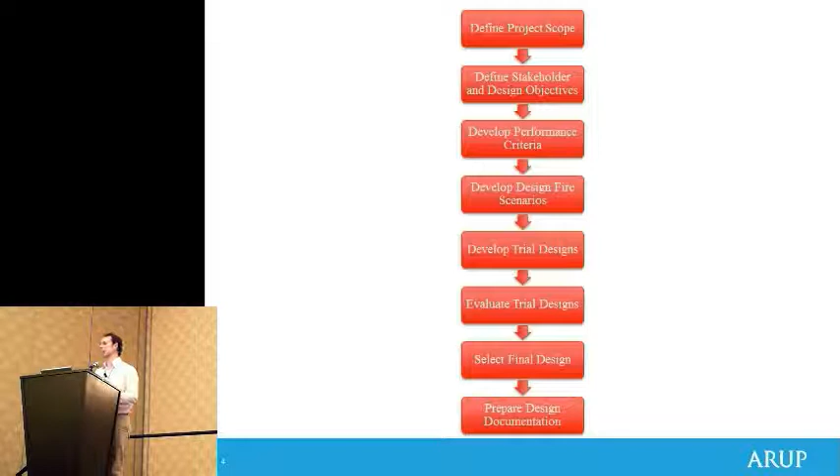The overarching theme for us really was to keep it simple, keep those systems simple. And from a technical point, one of our objectives was to keep it independent from the Amtrak yards and Penn Station to the east of the site, so that we weren't dependent on their systems and vice versa. So stepping through the rest of the methodology, it's really typical of the SFPE guide, which many of you will be familiar with, and I'll give you a brief overview of each of those points.

So as I mentioned, the key life safety criteria are really looking at the evacuation portion early on when the fire actually starts off and we get some sort of alarm, getting those maintenance staff out quickly, and then making the conditions suitable for the firefighters as well. The criteria for those is somewhat different, as you'll be generally familiar with.

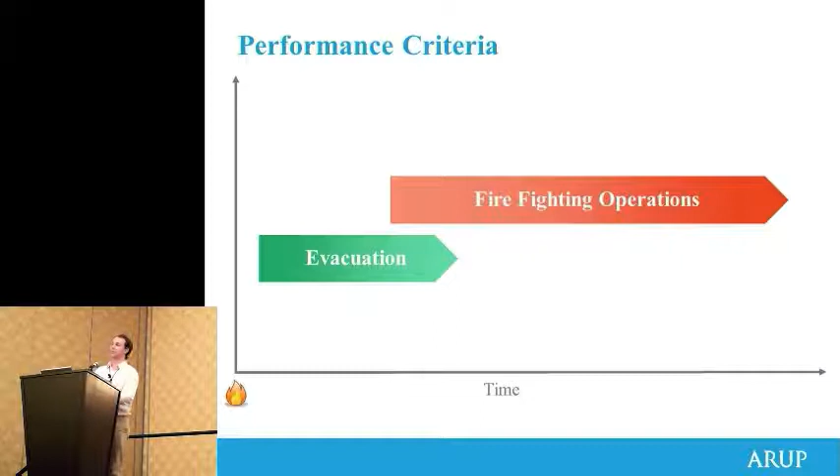For occupants, we're looking at your standard visibility and temperature, but then for firefighters, they've got their full turnout gear, which means that they've usually got breathing apparatus, so visibility and toxicity are less of an issue, except visibility in terms of being able to find the fire and walk through clearly. And in terms of thermal exposure, they can withstand a much higher temperature than occupants.

So the critical metric really was to look at getting people out early. And what we really needed to do was have a clear understanding of what the available exits were and what the occupant load was within that space.

So working with the Long Island Railroad, we were able to establish what the occupant load was for the space, which was roughly 125 occupants within each of the various maintenance buildings, and then up to 25 within the yard. So it's quite a low occupant load when you consider the types of buildings that we're often working with.

There were 6 exits scattered around the site, but really the critical thing for this site was travel distance. Because you've got various train consists on the site, some of the occupants would have to walk up to 890 feet to get to an exit because you can't actually transfer between the trains.

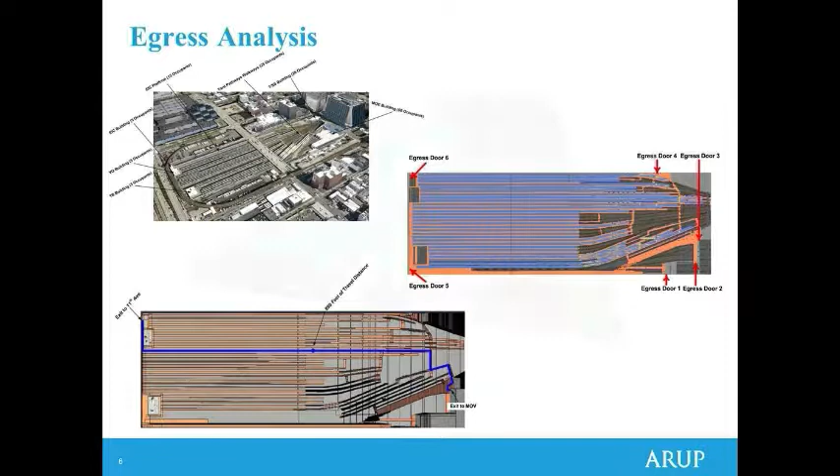So for this project, we did actually run a model, but it's important to note that particularly with a low occupant load like this, we didn't really need to. We could actually establish what our performance criteria is just with doing our basic NFPA 130 hand calculations.

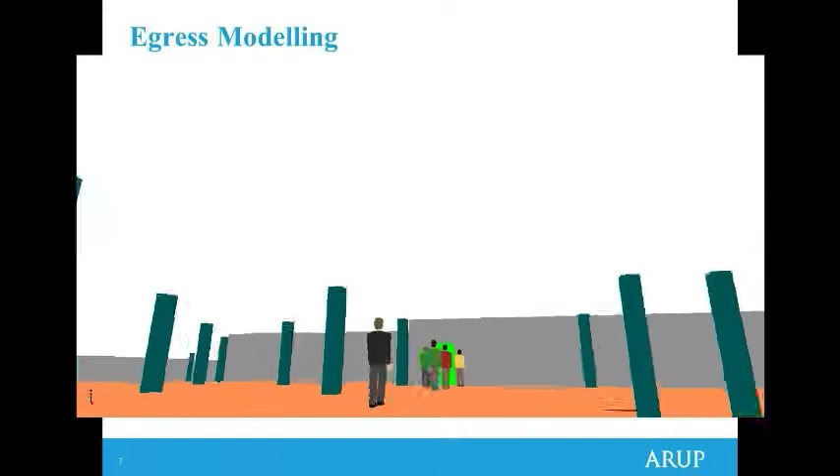But the real benefit of running a model in this type of situation is improving the project deliverable, which is all about impressing our client and also being able to convey the design to the authorities as well, which really helps to convey what we're trying to achieve within the space and give them a sense of the conditions.

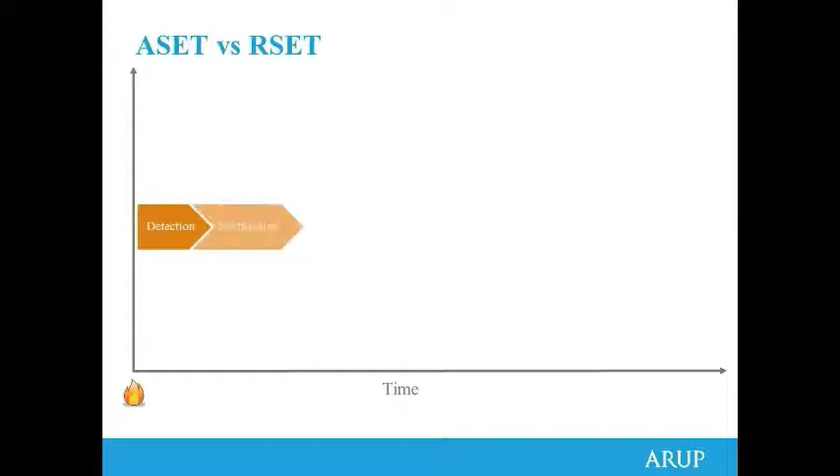So stepping through this in terms of our performance criteria, you'll be largely familiar with this. We break it down into detection, notification, pre-movement and movement time to establish our evacuation time, and then having some minimum margin of safety, which we typically aspire to be 100% of the movement time. And we get an overall time that is really our starting point in terms of what we need to maintain with our smoke systems.

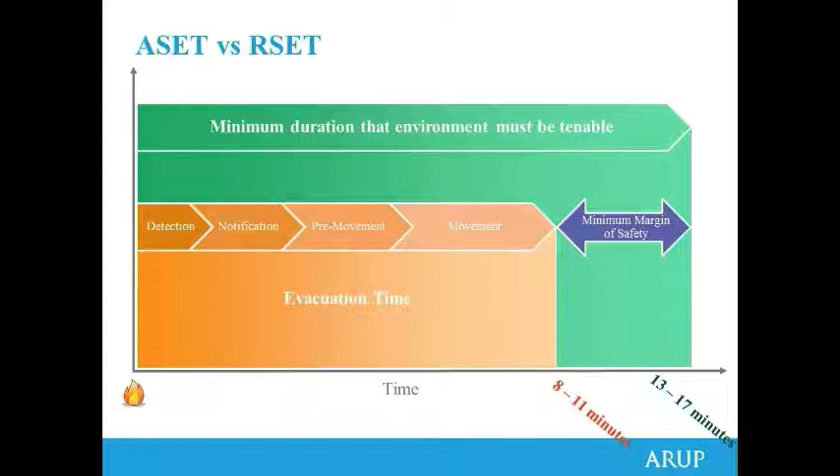So a summary of that, we had basically a range of 8 to 11 minutes for our evacuation time using sprinkler activation, typical notification and pre-movement times, and then using the modelling to establish the movement time. If we incorporate the margin of safety, we were looking at the range of 13 to 17 minutes that we need to maintain occupant tenability.

So getting into the design fire, the actual design fire curves you'll see here are governed by Long Island Railroad, which actually works quite closely with Amtrak, and they have two fire curves. They have a single rail car, which grows up to 5 megawatts, then to 10, and then eventually up to 31 megawatts at the peak heat release rate.

And they also have a 2 rail car fire, which basically involves roughly at the 23rd minute fire spreading from one car to the other. And those really were kind of the basis for our design fires.

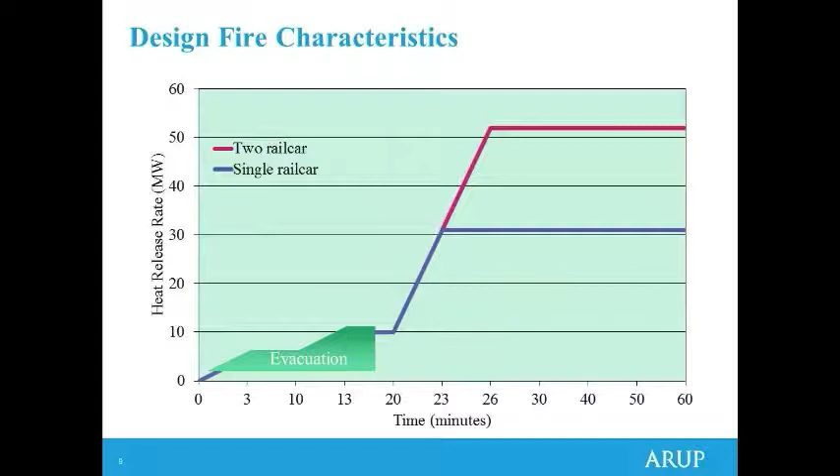If we look at that in the context of what we're trying to achieve, which is really occupant evacuation and secondly firefighter intervention, you can see the evacuation actually occurs before the two fire curves actually separate. So it's really within that early period up to 10 megawatts, and then firefighter operations from then on.

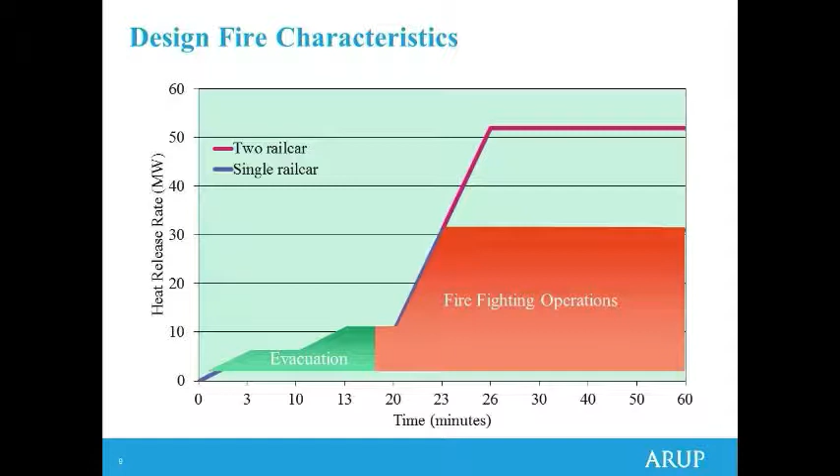The second thing to note really there is that firefighters will be on the site quite early. They're actually required to be on site after an alarm within 4 minutes. So they'll be getting water onto that fire quite easily before the 23-minute portion, before it spreads to the second car.

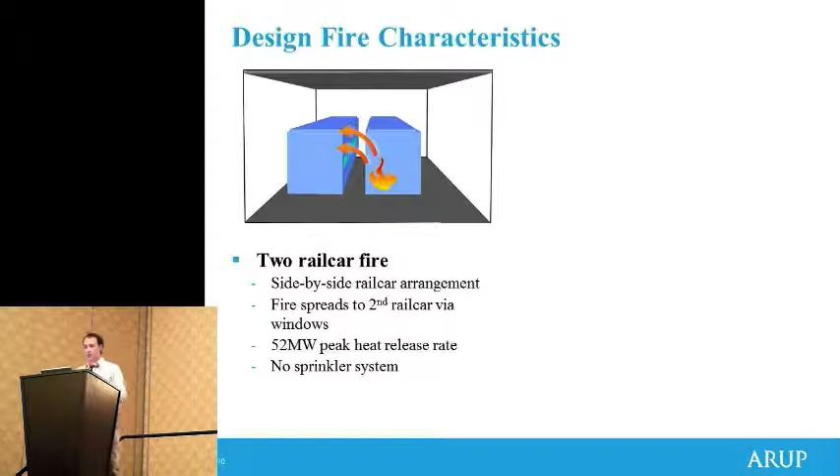Okay, so looking more at the 2 rail car fire, what we wanted to do was have an understanding of that. And really it's governed by essentially fire spreading from one to the other. But what we actually wanted to question there is what is the effect of sprinklers? This case here is actually based on an unsprinklered case. We wanted to understand what the benefit was of providing sprinklers in that space and if that could actually prevent fire spread.

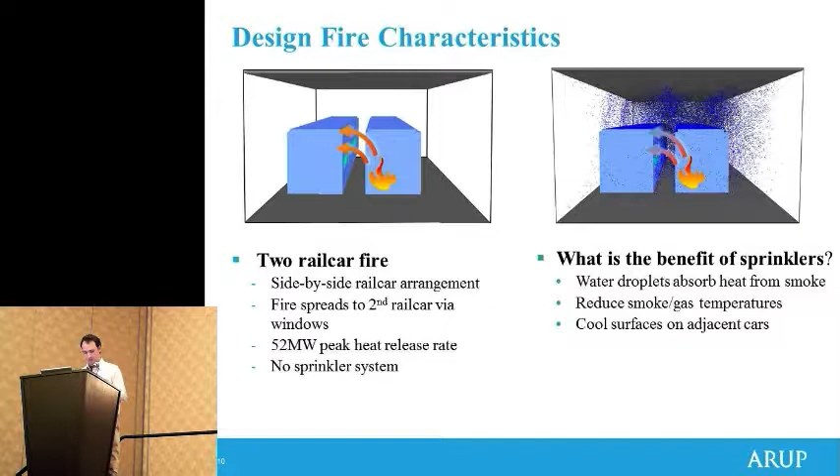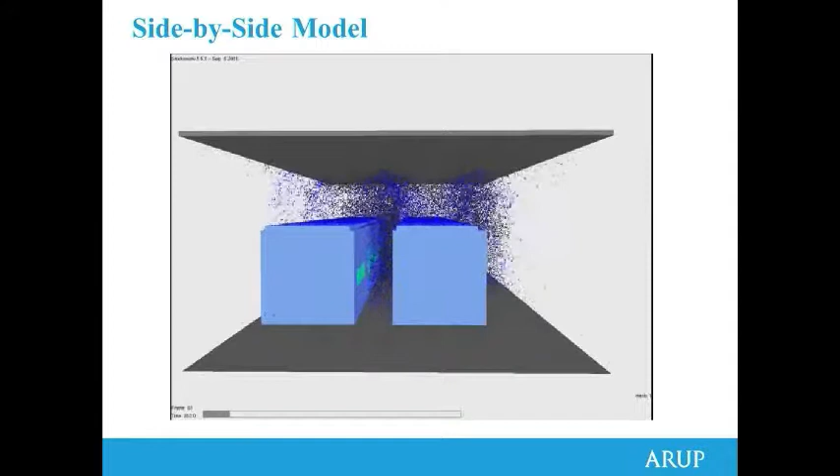So what we did to start off with in the design, we actually set up two models. We set up a side-by-side arrangement which reflected the Amtrak setup. And we also set up an end-to-end arrangement which simulates 2 cars in an 8-car consist, for example. This is a sprinklered case. We've got tracer particles for smoke in black, and the blue represents the sprinklers.

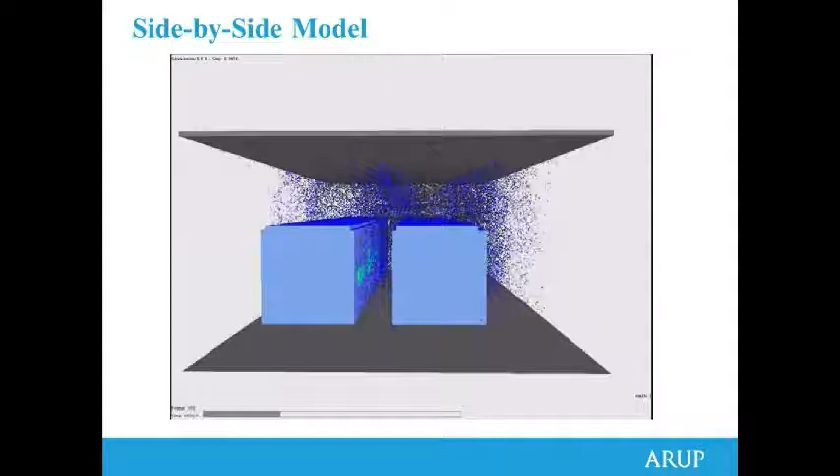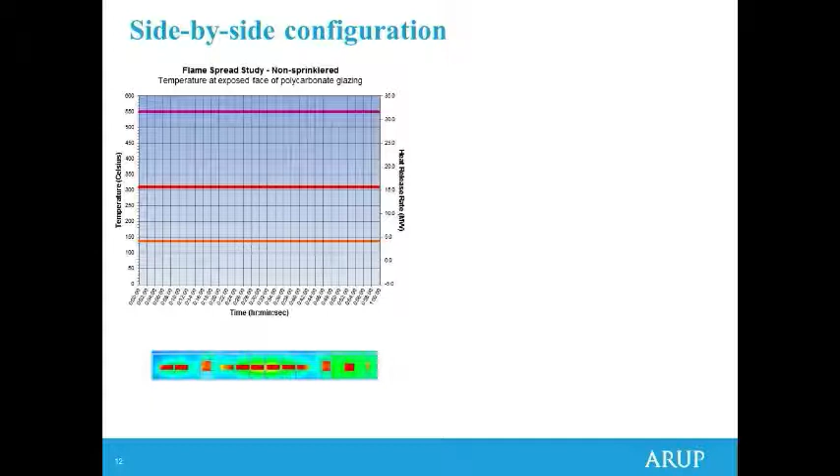So essentially our criteria in terms of looking at whether sprinklers would actually prevent this, in the range of 138 through to 310, if that temperature was maintained for a significant amount of time, we would consider that to be a failure.

So having a look at the results here for our non-sprinklered case as our baseline, these lines actually represent thermocouples on the adjacent car's windows. And as you can see, the temperatures go past the deformation temperature at roughly 20 minutes, and they exceed very, very rapidly up into the next phase. Just for reference, you can see the heat release rate curve and the alignment there.

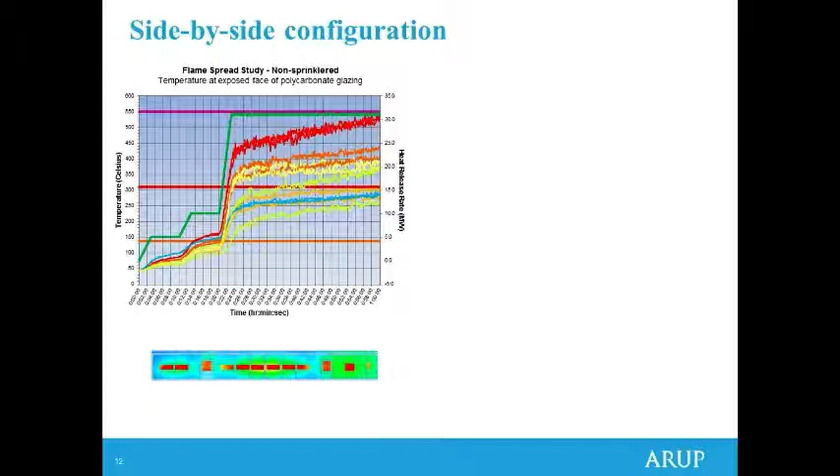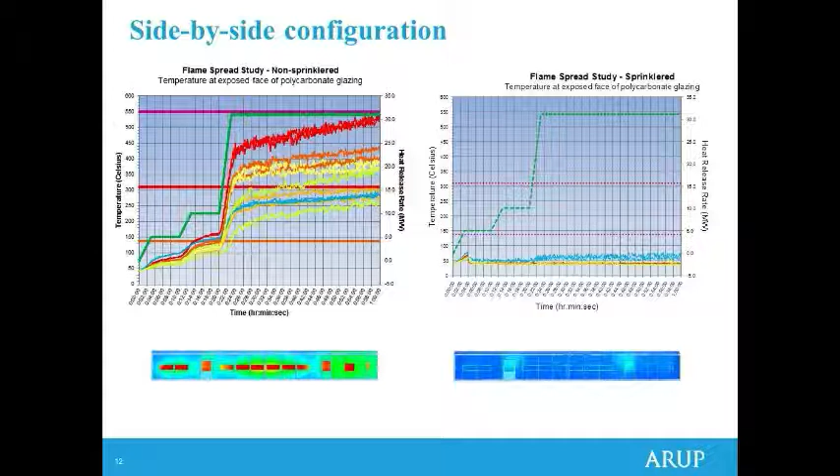Now, the end-to-end sprinkler case also passed. In that situation, it's actually a 2-foot separation as opposed to a 4-foot for the side-by-side. So the results are a little bit closer. Those details are in the paper. But these two results really got us to the point where we could confidently say, if we've got sprinklers in place and keeping in mind the fire department will be there when they get there, we could justify using a 31 megawatt fire as opposed to the 52.

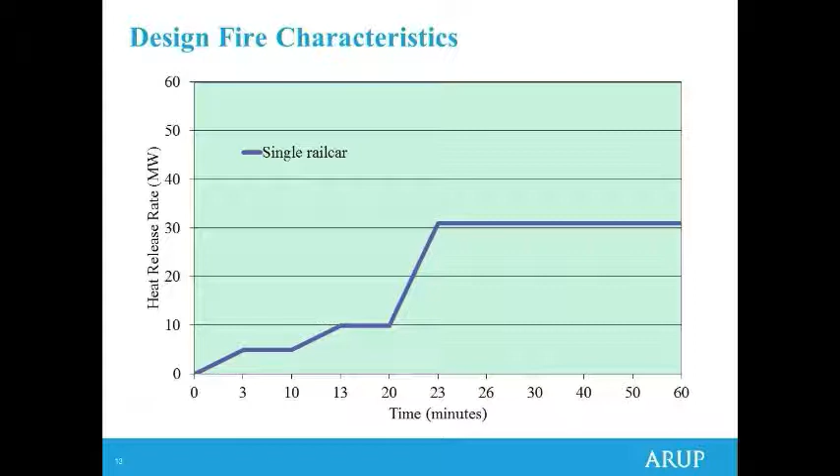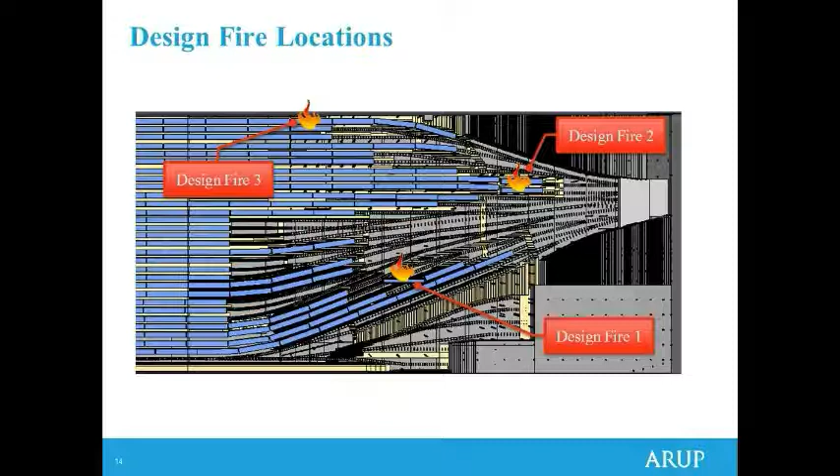Okay, so getting to design fire locations. The basis of our study, we looked at 3 basic locations. The first is a design fire near the maintenance building on the southeast side. The second is in the narrow eastern throat region to the east of the site, and that's actually a lower ceiling height region. And the third was on the northwest side, which is beneath one of the towers on the site, where the structure is a little bit lower and a little bit more difficult in terms of maintaining tenability.

So one of the things we really wanted to do with this client, we're working with a developer which is largely non-technical, and we really wanted to convey to them the notion of multiple exhaust points versus single exhaust points, and some of the trade-offs with those. When you're using less exhaust points, you tend to be less efficient, issues such as plug holing and so forth, and you end up with an increased required capacity. Whereas if you're using more inlets, you tend to end up with a more optimized design, but there are issues with constructability and those kind of things.

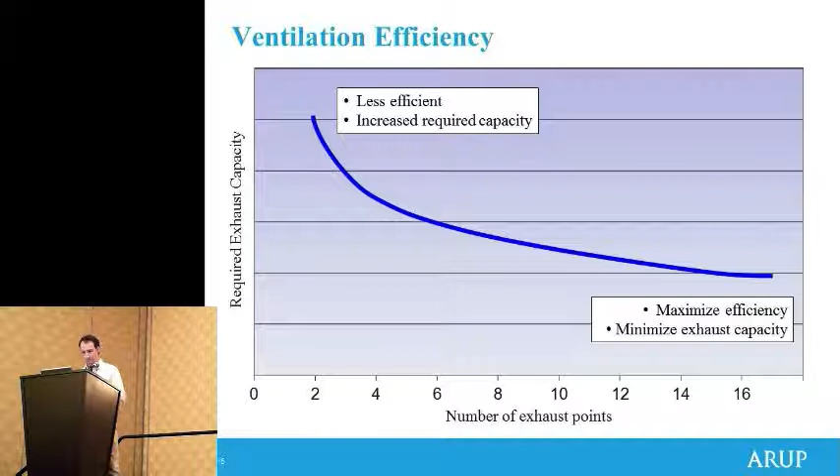So when we actually came onto the project, there was a scheme in place, the 2008 scheme, which is quite small here, but you can see there are 3 exhaust inlet points on the site, and then they're looking to provide make-up air from the east and west portals. And working along the theme of the graph here of more versus less, we wanted to suggest a number of alternatives to really address the capacity, because this design was somewhat problematic because of the proposed capacity, and also the reliance on make-up air from the east side of the site, which, as I mentioned earlier, was something we were trying to avoid.

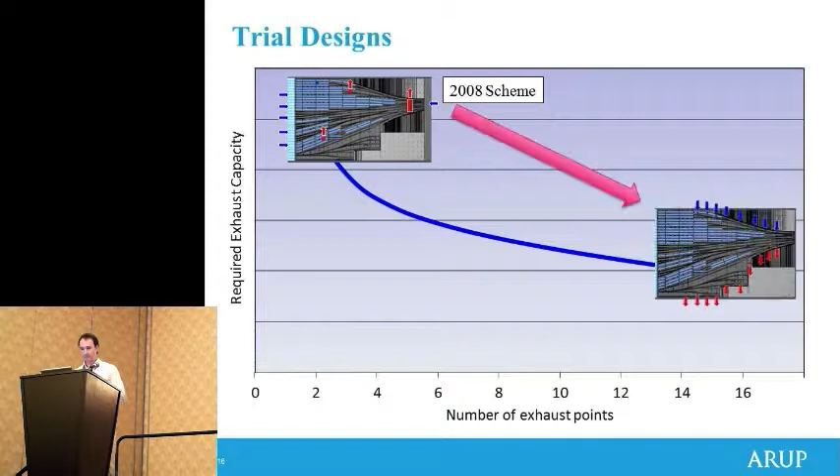So our first scheme was really on the other end of the spectrum. What we actually did was we had 10 discrete exhaust points on the south of the site and 10 supply points on the north of the site.

And that served a number of purposes. Really, it made use of the deep structural troughs on the site, which ran north-south and were up to 6 to 7 feet deep. It was independent of the Amtrak yard and the west yard, and it also significantly reduced the exhaust capacity for the site.

Some of the issues, though, was because we were actually providing supply air mechanically, there were large demands there, and it was also somewhat difficult in terms of constructability, actually getting each of these exhaust points onto the site. The real point of it, though, is to develop a working solution. We were under a very demanding schedule. What we really wanted to do was get one on the board and prove that we could get something working and then work back to something that was more buildable. So this is the first solution, the first one that I've just discussed.

Here we go, ventilation 2. So we went back and we worked with the 2008 concept plan. And really the reason why we did that was because at the point when we got involved with the design, a number of the buildings on the site were already in place, the landscaping was starting to be developed. So the two main points you see there are actually within the site and largely fixed. So we wanted to work with those and see whether we could actually make it work within the design intent.

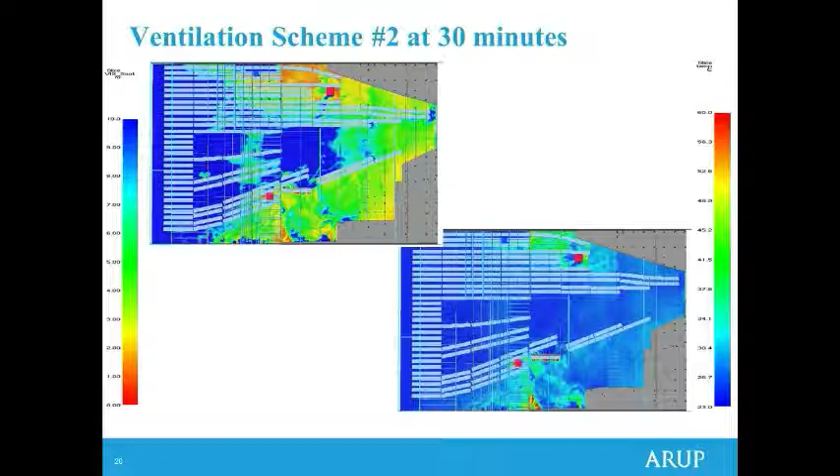Looking at 30 minutes, which is into the firefighter portion of the timeline, you can see it's really deteriorated within the space. In both levels, temperatures are starting to get excessive as well. I'll get into some of the reasons why that happened, but clearly one of the main things was when you're exhausting, the amount of exhaust that we're doing from two single points, plug holing is a key issue. Efficiency and also robustness, because you're only exhausting from two spots as opposed to good coverage across the site.

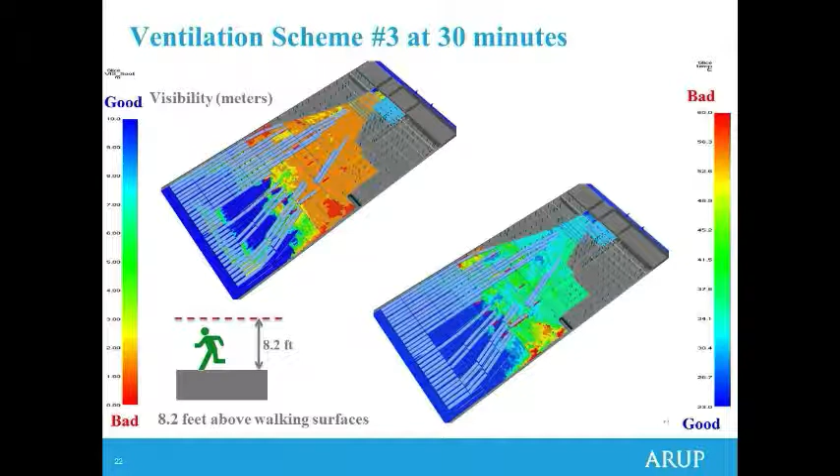What we did from there was basically create two plenums. So we have an east plenum and a west plenum with four discrete points within them, discrete slots, and still the same arrangement in terms of supply. With this result, it was worse. So we were a little bit puzzled because it was somewhat counterintuitive in terms of what we expected. And so when we investigated, we started looking at velocity profiles and so forth. What we could see is we essentially underestimated the depth of the plenums and the effect that would have.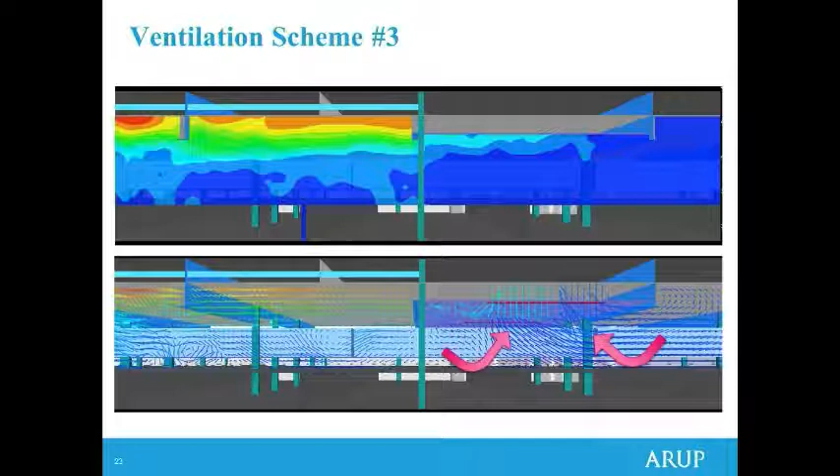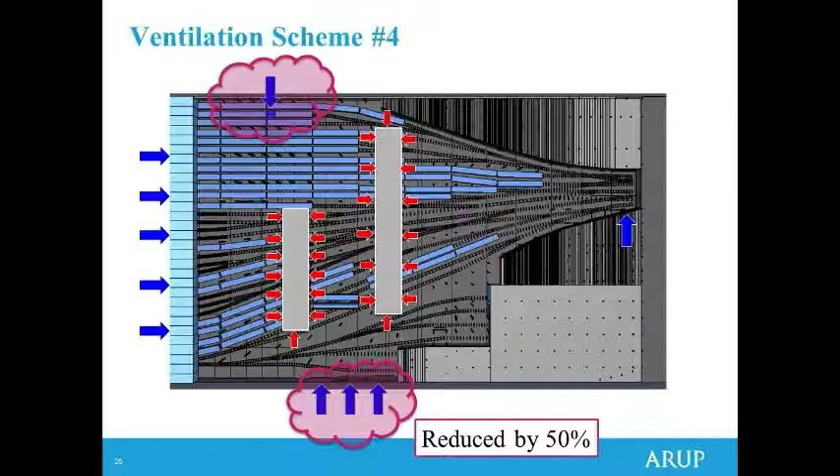And what was happening is we would tend to be drawing ambient air still and some of the less hot air as opposed to the upper hot layer. And the other effect of having the plenums is it actually removes some of your smoke reservoir. So what we did is instead of drawing from underneath the plenums, we actually drew from the side of the plenums, and we looked to rectify it using that. This is the schematic. So in doing so, we actually increase the number of exhaust inlets as well. One of the other things we noticed in the early designs is we were getting some mixing, which I'll get into a little bit later, and so we reduced that by 50% as well.

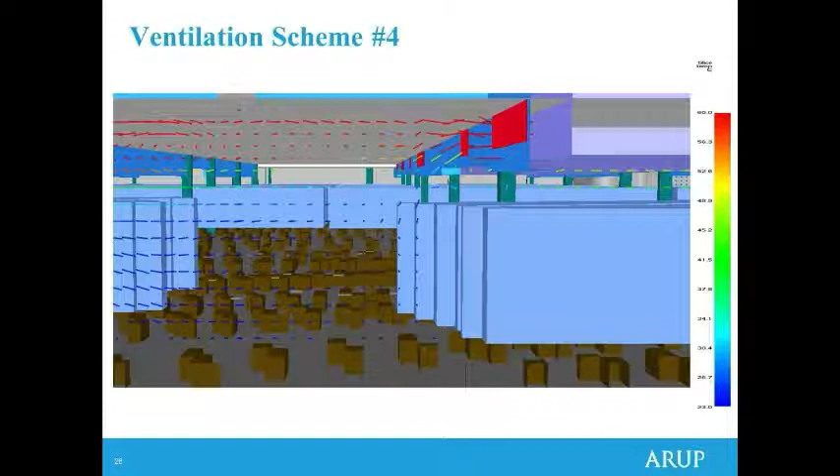This is a velocity profile of that revised scheme. As you can see now, we're pulling in much more of the hot layer up at high level as opposed to the ambient air and the lower temperature air that we were in the previous one. If we look at the results of that, they're markedly improved. We're still getting some visibility impairment on the north and south, but generally the results are starting to go in the right direction.

Something to note here, if you look at the scales, you'll see they say good and bad. And one of the key things when you're trying to get across to clients is to really make this as simple as possible so people can understand it, because we're speaking to a technical group here, but I thought I'd leave that in for you. Red being bad, blue being good.

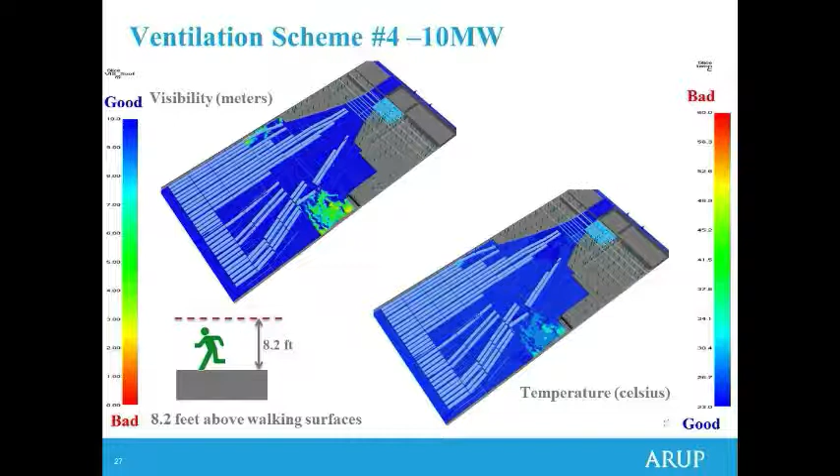Okay, thanks. All right, so this is talking about some of the mixing that we experienced with those north-south plenums, which resulted in some of those visibility issues. And the big thing there was we found that it was causing somewhat of a shearing force and causing that mixing to occur.

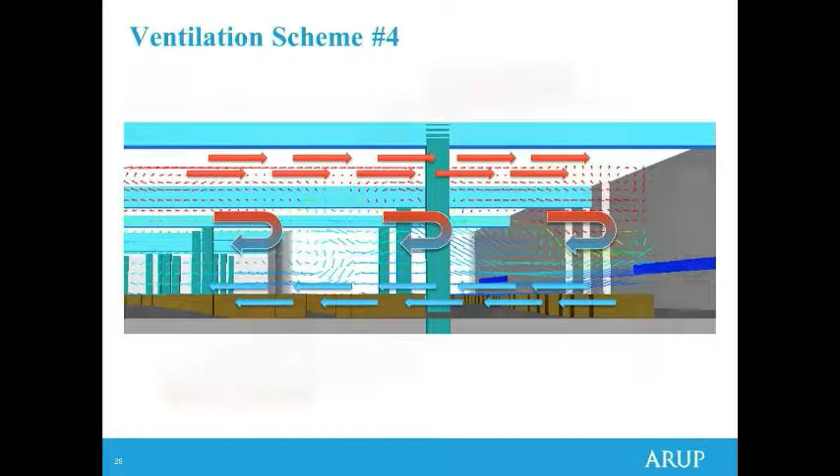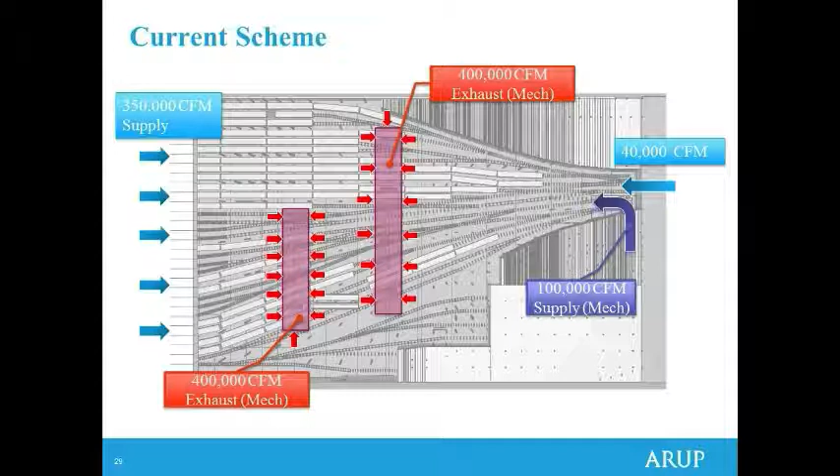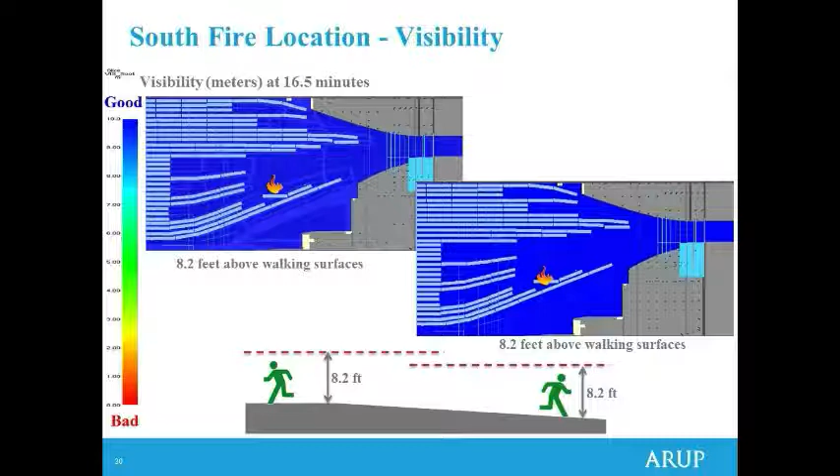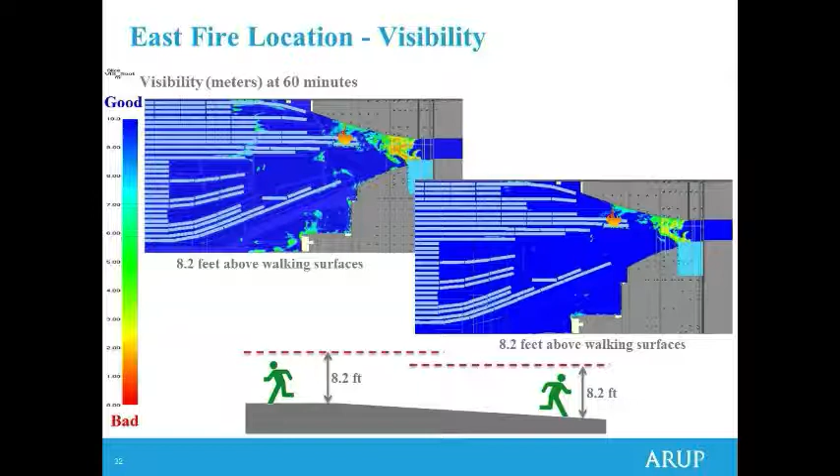If we then look at visibility at 60 minutes when the firefighters might be there, as you can see, you're getting some mixing at that end of the site, which is less than desirable, but considering the firefighters will have breathing apparatus and protective gear, it's somewhat acceptable, not to mention that it's within an area away from the actual fire site.

If we look at temperature then, which is the key criteria for the fire department, we can see that's well below firefighter criteria of 100 degrees C, and also even for occupants of 60 C.

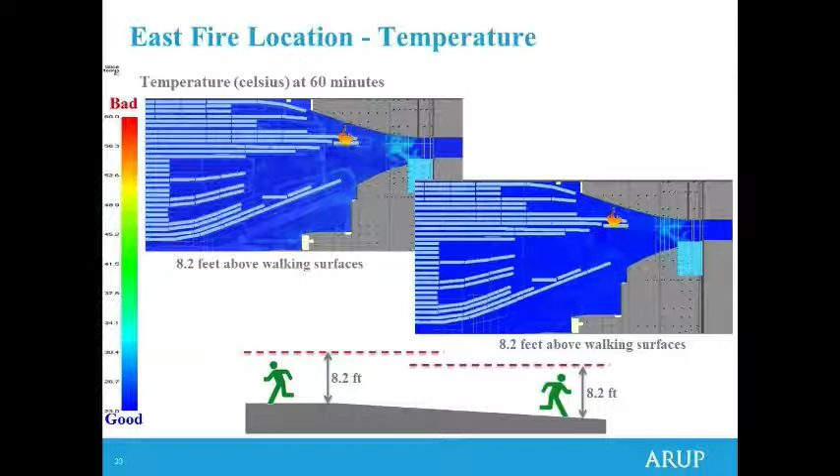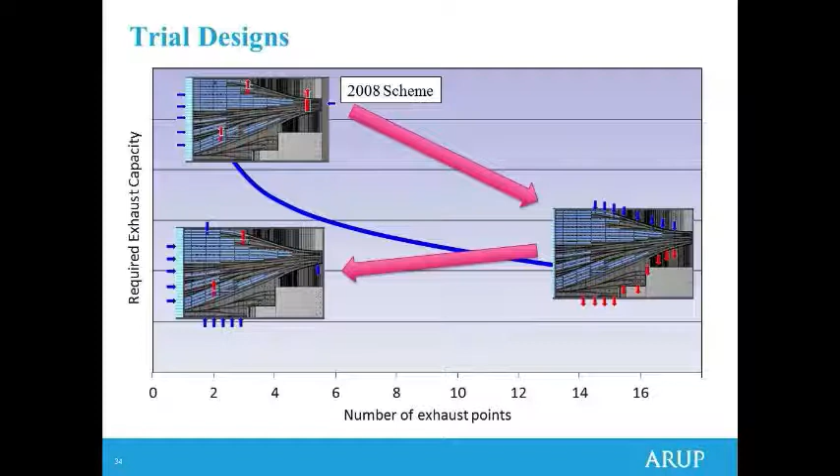So just travelling through a story of those designs, we really started with a 2008 scheme that had a small number of inlets and a very high capacity. We worked through the other end of the scale to something that really lowered that capacity but was difficult to construct. Working across the page, we went back to our 2008 scheme, and then we ended up somewhere in the middle where we had a good balance of exhaust inlets and supplies that we could actually build that had a low capacity and met our performance criteria.